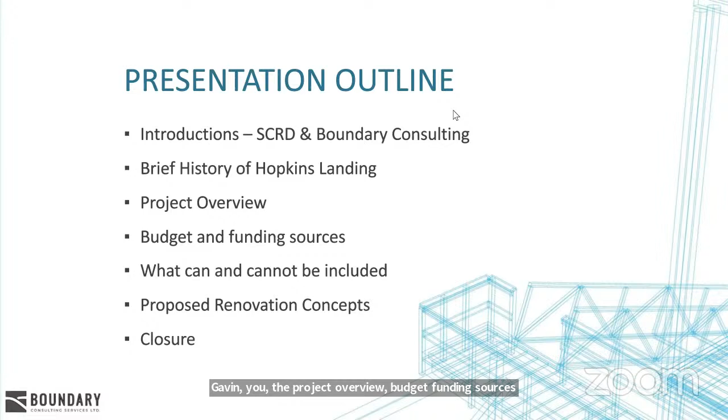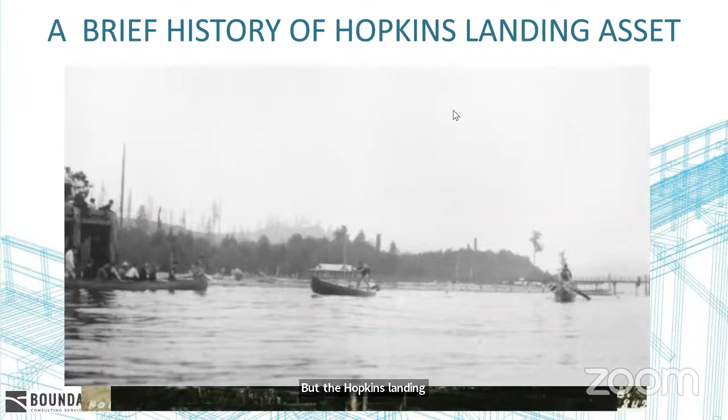My understanding of the history of this dock is related to the Hopkins Landing story. There will be many versions and iterations of personal history littered throughout the crowd here, so I'll just give a general history presentation forward, and if I'm wrong, please feel free to come correct me after we're done. The Hopkins Landing Wharf was initially constructed in the early 1900s, between 1906 and 1910, after George Hopkins had purchased the initial 160 acres that surrounds that area.

And the community of Hopkins Landing got together and decided that a wharf was an excellent idea for the small community.

Given the general age of everybody in the group here, I don't need to get into the fact that these communities used to be very barely serviced by road. A lot of the communities' early economic development was driven through watercourse and through the construction and utilization of wharfs. For instance, in the small community of Hopkins Landing, all of the mail went right into the basement of George Hopkins and was handed out there for a little while. These kinds of things.

So the community has had this asset for a very long time. Through the years and iterations of different local governments and local community groups, the SCRD has grown and agglomerated and become a regional district in 1967. All these assets have ended up in the SCRD's lap, through a process of dedication and through not having reasonable stewardship for land in some of our docks, and in this case, because it makes sense for it to be a community asset. It always was. So in 2001, the official ports community group was made within the SCRD, and you can just keep going through there with that.

Oh yeah, we took that detail slide out, so we'll hit the project overview for a second. In 2001, the ports group was made within the SCRD. Since then, the ports have been receiving relatively minimal maintenance over the last 20 years compared to the overall degradation of the assets. In 2020 - my work was initially in 2018 - on these docks, inventorying these assets. In recent years, there have been a few condition assessments that identified that this dock has a few major structural issues with it.

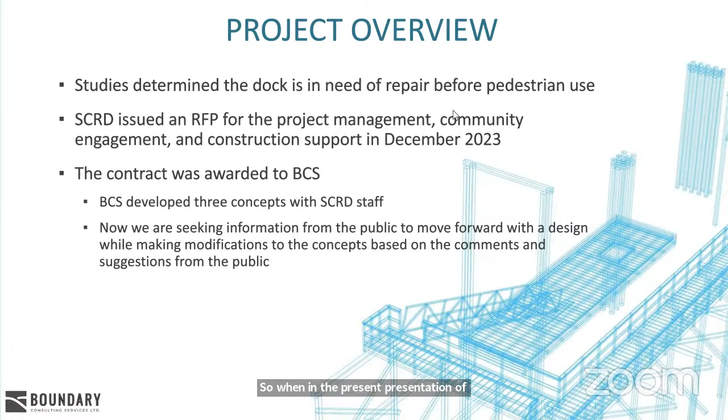Sorry, we'll go back to that one in a sec. Let's just go to the concepts.

As the concepts behind you show, concept one is keeping the entire facility as it is and renovating all of the existing timber underneath that needs to be replaced. There are also some poor repairs done over the years that need to be corrected, essentially to maintain full access to the end and keep the dolphins and everything as is.

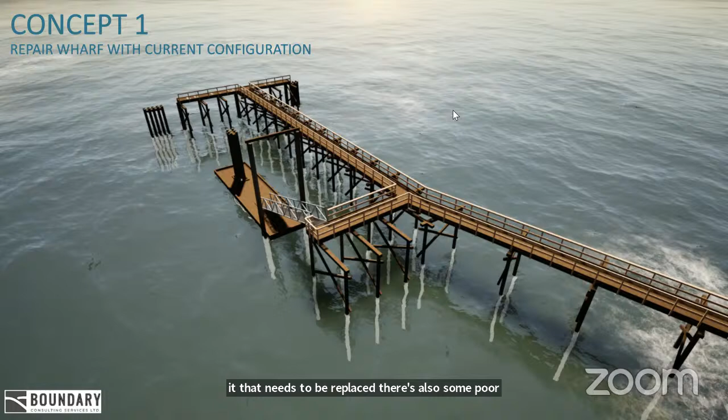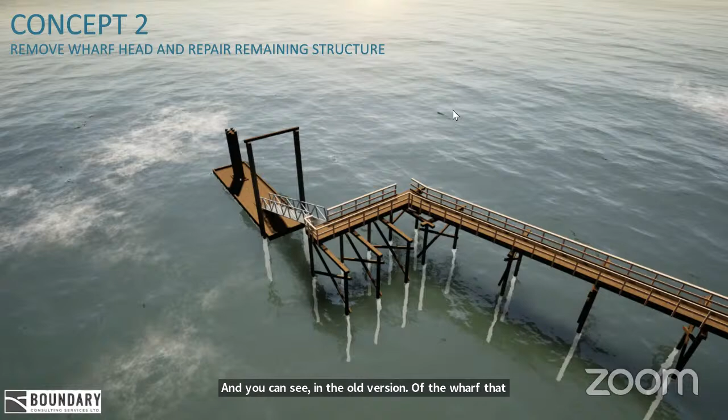The next concept, if you flip to that one, is removing it down to just boat access. In the old version of the wharf used for vehicle traffic, you can see several areas of this dock that have had planking and stringers removed.

The third concept takes that idea and ties it in with an increased area. Currently, especially walking down the main gangway on the right-hand side, several stringers and pieces of decking have been removed. In this concept, we've extended the area beyond the gangway to the full width, as well as the vehicle timbers that used to be on the turnaround before that.

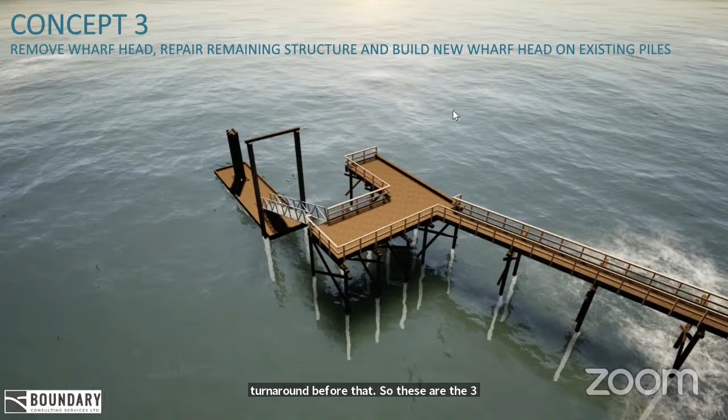These are the three concepts we've agreed with the SCRD to present to the community as ideas to move forward with, and we're looking for your engagement to understand what may be good about them, what may be poor about them, and what you may want to see different.

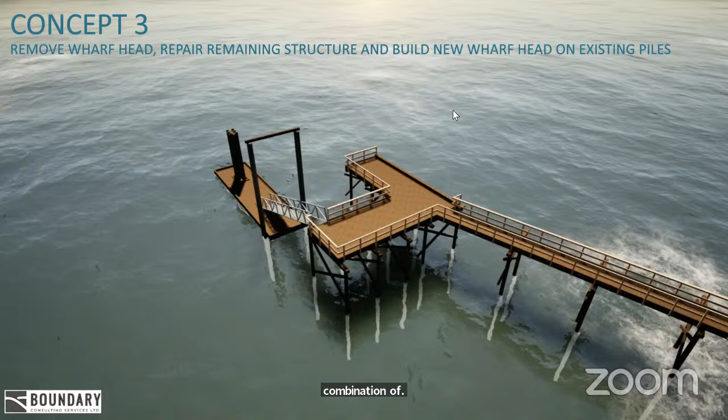This is a bit less traditional. We're not doing community engagement where we open the floor for a big discussion directed at one person up here. We feel it's more conducive to having a group discussion on the floor.

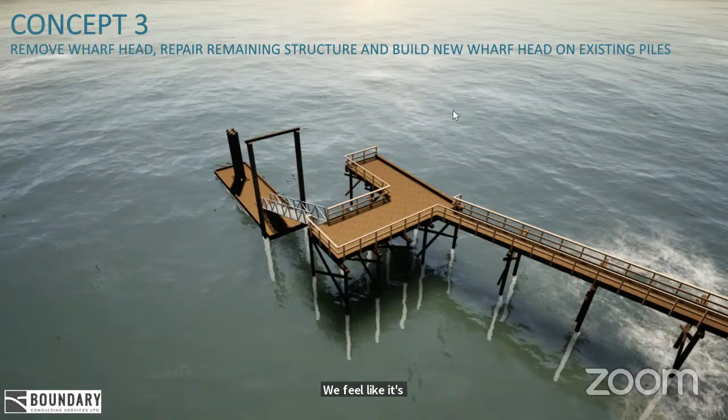Going back to what's in and out of the project, it's important in these projects to have some boundary to what we can and can't do. One thing that was very clear early on is that the tenure for that dock is very close to the edge of the dock, so expansion of the dock within this renovation project is not likely feasible.

Just as reconstruction and expansion into the north of the wharf wouldn't be feasible either. So what they've really requested is concepts that maintain the existing service level the dock facilitates, which is personnel access and access to the floats.

What we're looking for from the community are improvements that can be renovated within the existing three-dimensional structure of the dock, or things that can be removed to improve use. Some things discussed with us include ideas like swimming access. We're trying to keep the boundary of this project as close to just renovating as humanly possible, so it can actually be done.

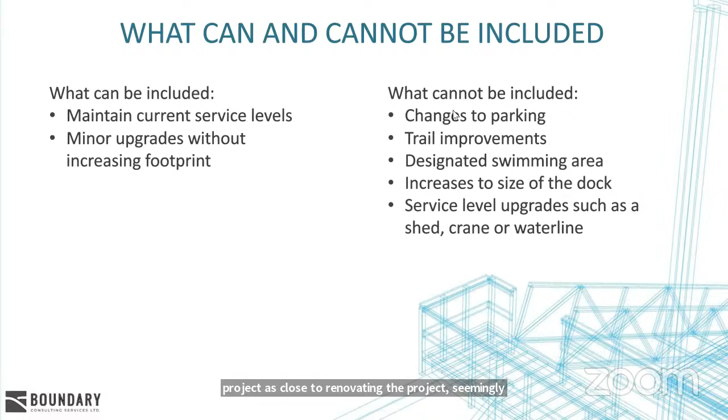When it comes to things like increasing service levels for swimming, or a new dock facility, new float facility, these are things that can be considered, but it's recommended in general that we try to keep them as separate projects from this one.

The budget currently approved by the SCRD board is $500,000, including all technical work, and that includes contingency.

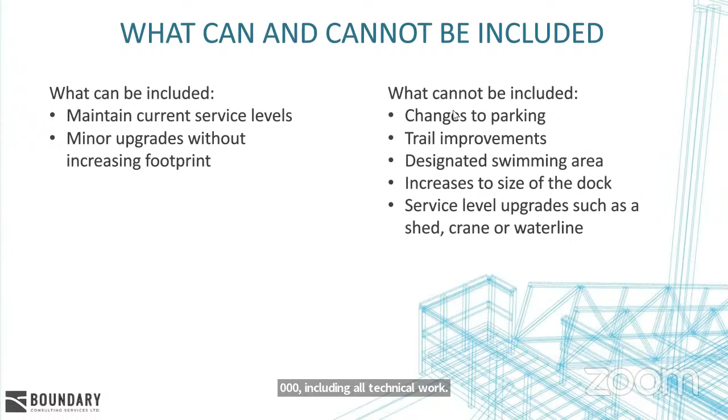So do you mean keep the existing float that we have, not construct a new one? Yes, exactly. So keep that one, but fix what might need to be fixed, and improve it.

Something I've been hearing consistently is that concepts 2 and 3 have been presented as being exposed to the elements, and certainly they are more exposed than option 1 is.

Some things we can consider are partial removal of piling in order to maintain fendering and storm protection. We haven't gotten too technical on the project yet, because we want community engagement before presenting complicated technical work. It's our desire to boil down, through community engagement, which option we're going for, so we can spend the least amount of money possible resolving technical issues.

Yes. The council has set the budget. Sorry, the question was asked, has this been to council? And yes, council has reviewed the work and set the budget at $500,000 for this work.